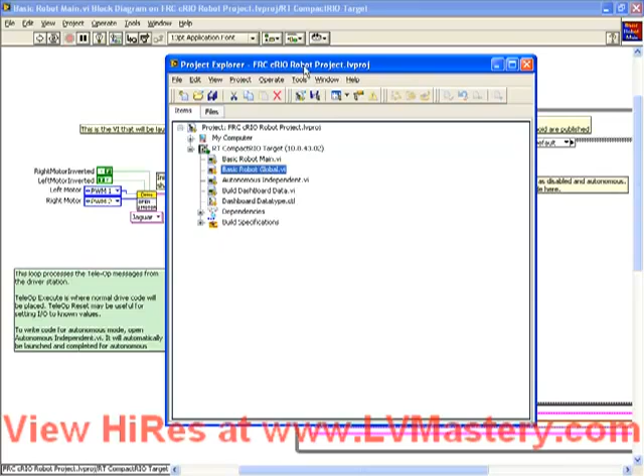Let's start again on the basic robot main VI. If we click on our project window, we can always access the basic robot main VI by double-clicking on it. Then we can show the block diagram to investigate the code. As we saw before, this code is provided with the FRC version of LabVIEW, and the modifications we've made here are really just two additions, similar to what we did in the end of the last video.

I've added a servo. I open that servo by creating a reference to it outside the loop here and by feeding in the necessary channel. And in this case I've also added a gyro. So I've opened up a gyro sensor and I've attached it to analog channel AI1.

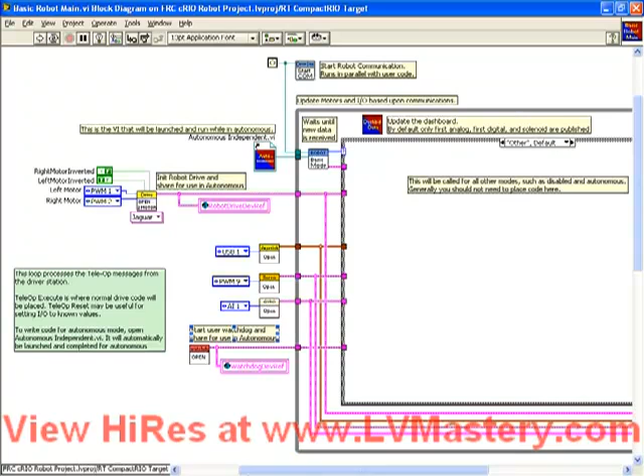As discussed in the last video, you need to open a reference to these objects, whether it's a servo or a gyro or any other object. You need to do that outside the while loop on the left hand side here, and then you wire into the basic robot main. We've done that here with both the servo and the gyro. And if we follow these wires around, we've also made copies of the servo close and gyro close, and we've wired those reference wires into them.

When we take a look at the teleop execute case, we see that we've got the gyro get angle, and if we turn on our context help, we see that that returns either the angle or the angular rate from the gyro. And we've got the servo set angle, which is going to allow us to change the angle of a particular servo motor. The functionality of this code is really quite simple and frankly entirely useless, but it's good for a demonstration of how we can connect a sensor up to an output.

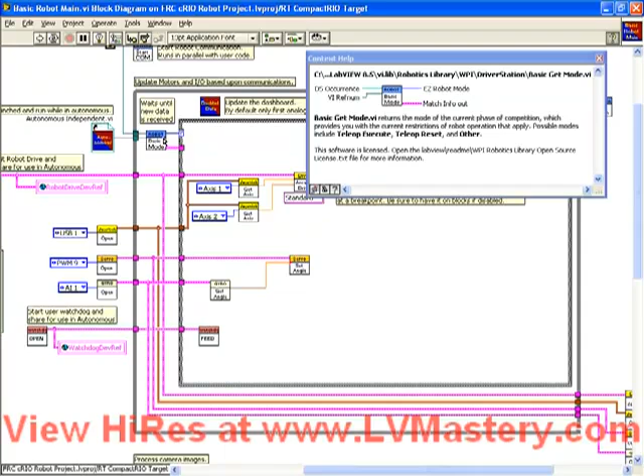At any rate, we wanted to talk more in this video about the autonomous mode than the teleop. If we take a look here, we've got this block called the basic get mode, and this is a VI which is provided in the WPI library, and it's something which we should not modify at all. Essentially what it does is it communicates with the driver station, finds out what mode the robot's in, and spits out a value which is then used by this case structure to decide how the basic robot main should function.

If we pull down the selector of this case structure, we see that we've got the teleop execute case, we've got teleop reset, and the code sitting here will be executed whenever the teleop mode is reset. And we've got other. Other here is a completely blank case. As it says here, this will be called for all other modes, such as disabled or autonomous. Generally, you should not need to place any code here.

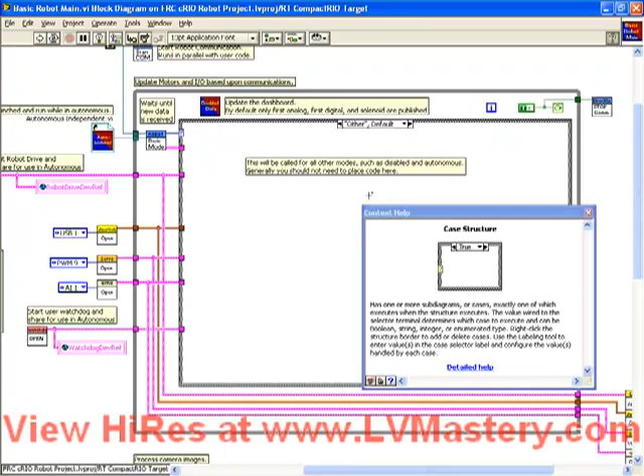So here we've got a blank case for autonomous mode, and the instructions tell us not to put any code here. So it leads to the natural question of, well, how do I write my autonomous code? Where does it go? The answer to that is actually sitting here. This is a reference to a VI called Autonomous Independent. So what does it mean that it is a reference? It's not the VI itself.

Remember what we learned about the data flow methodology within LabVIEW. If this was a VI sitting here, it has an output wire connecting to the input of this while loop. In other words, this while loop wouldn't run until this Autonomous Independent VI finished, and that obviously doesn't make any sense for our application. So it is a VI reference. In other words, it is a way to tell the framework of the code where our Autonomous Independent VI is.

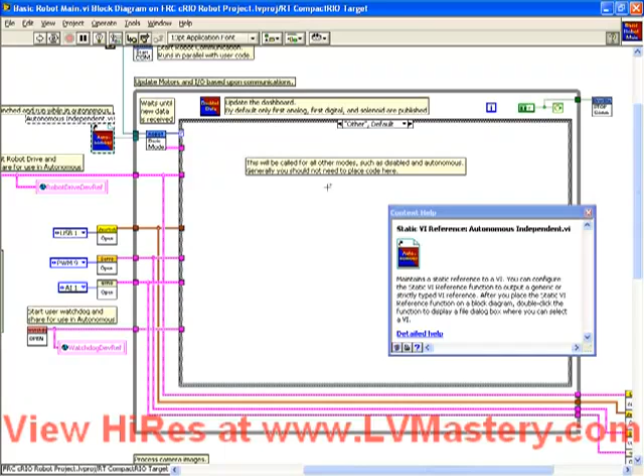Behind the scenes, the framework is taking care of launching and shutting down our autonomous code. That's why it's not sitting here. It's not sitting in the teleop. Actually, if you look very carefully down into the code inside this basic get mode, and we won't go through that at this stage, I think it's beyond the scope of this video, you're going to find where it automatically launches and automatically shuts down that Autonomous Independent VI.

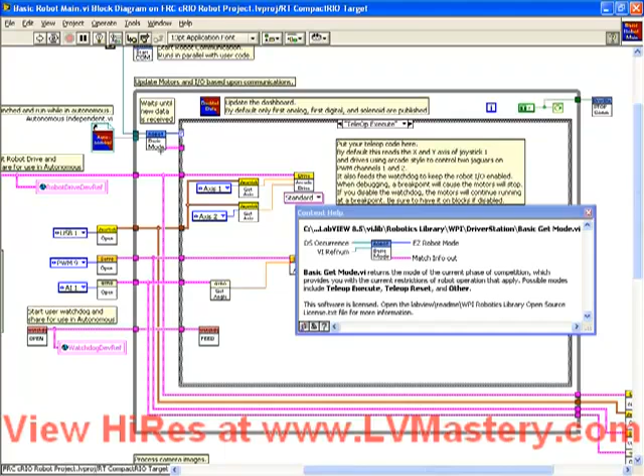It is enough for us to know at this stage that if we want an autonomous mode, we've got to put our code into this Autonomous Independent VI. We don't have to worry about when it gets launched and when it gets shut down. So how do we get at this VI? This isn't the VI, it's just a reference. Well, because it is a reference, if we double click on it, it will open the Autonomous Independent VI. Alternately, if we were to go to our project window, we would see sitting here in the root of our project is the Autonomous Independent VI.

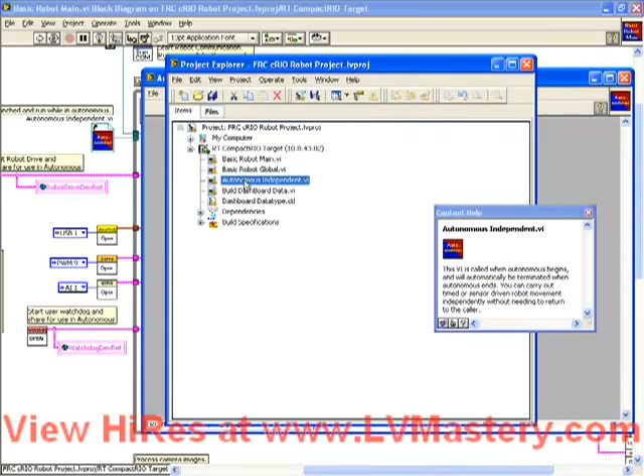So that VI is automatically created for us when we create a project. So if we take a look at its block diagram, we'll see that some sample code has been provided for us. So if we just read the notes here: open or use shared I/O resources, run until the autonomous is over. No need to check for when to end. This function will be terminated when time is up. And it talks a little bit more about the Watchdog.

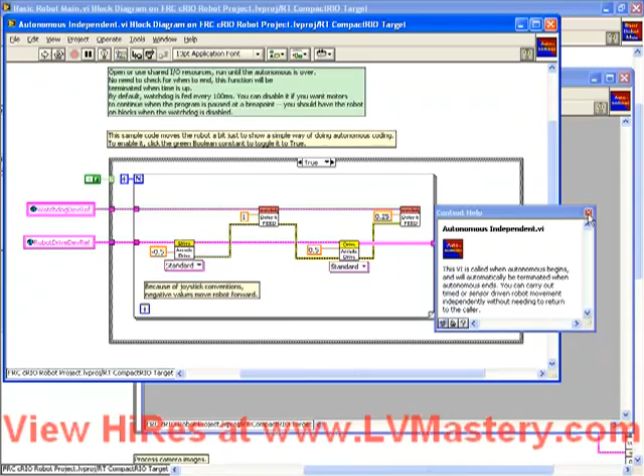Essentially what we have here, and if I hide the context help, is we have a VI which performs an arcade drive, a delay, an arcade drive, another delay, and then it repeats that 4 times inside a for loop. So if we activate this autonomous mode, our robot is going to move in one direction at half speed for 1 second, in the opposite direction at half speed for a quarter second, and then it's going to repeat that a total of 4 times. And at the end, it's going to set the speed to 0.

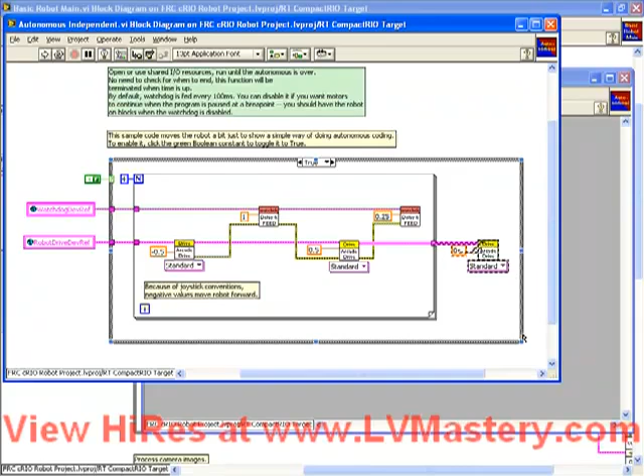So if you want to try this out, all you need to do is flick this Boolean constant to be true, and then when you run your robot next time and you flick it into autonomous mode, it's going to drive. So be very careful before you do that. Before you click run, make sure that the robot is up on blocks or it's not going to run into a wall or do anything crazy.

Don't let your mechanical team find out that the programming team broke it running some sample code. That'd be really quite silly.

So what I want to talk about now is how can we make modifications to this to suit our own purposes. Obviously, I think it's safe to say that this autonomous code is not going to work to allow us to win any points in competition. So we're going to need to change this code to do what we need it to.

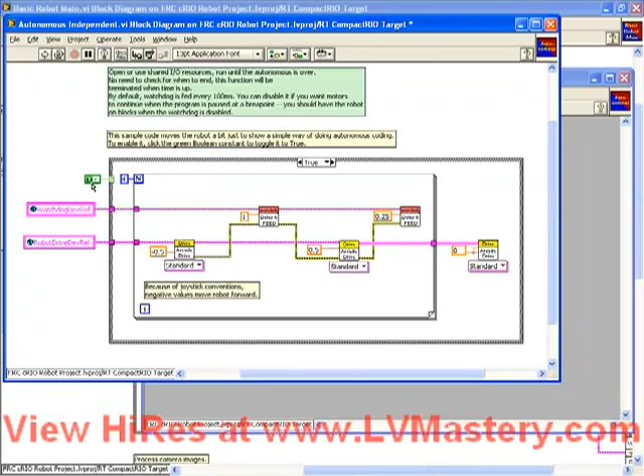So what we're going to do in this example is we're going to take the servo motor, which we've activated in our basic robot main VI. We want to control it in autonomous mode. I think what we'll do is we'll turn it to one extreme, let it sit there for 5 seconds, and then turn to the other extreme and sit there for 5 seconds, and then just repeat that continuously. So let's take a second now and look at what we need to do to achieve that. Let's go back to our robot main VI.

Well, we have a servo set angle VI, which makes it very easy, and if we activate our context help, we see all that we have to wire into that is a number which represents the angle in degrees. So we know how to do this. We can put in a servo command, which is going to send it to one extreme. Then we can use a delay block, and then we can put it to the other extreme. But before we can do that, what we have to notice is when we wire up the servo set angle, we need not only to set its angle, but we need to tell it which servo we care about. We need to do that by wiring up a servo ref.

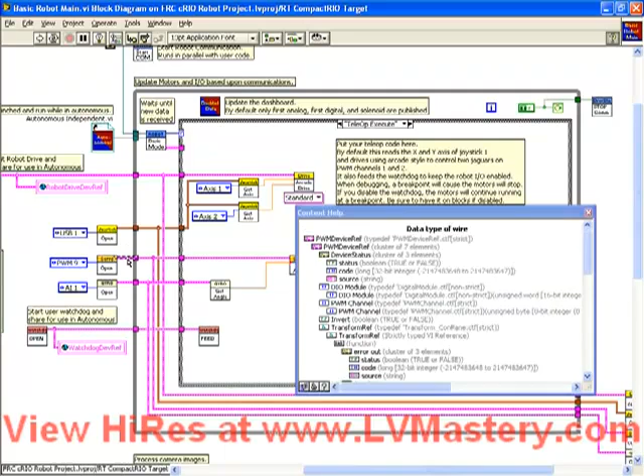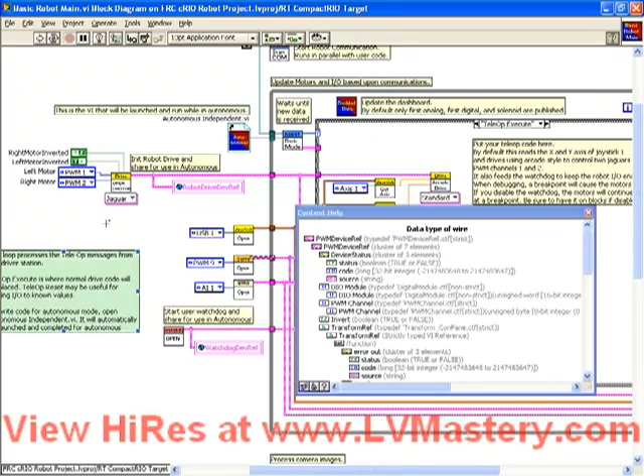So here in our basic robot main VI, we opened up a servo. We opened up the one attached to PWM9. So what we need to do to be able to talk to that servo in autonomous mode is we need to be able to access that reference. And when I talk about that reference, I'm referring to this wire. So before we get to the answer on how to do that, let's just take a quick look a little further to the left, because we noticed that that autonomous mode was talking to our motor drives. Let's just return to that to take a look at it.

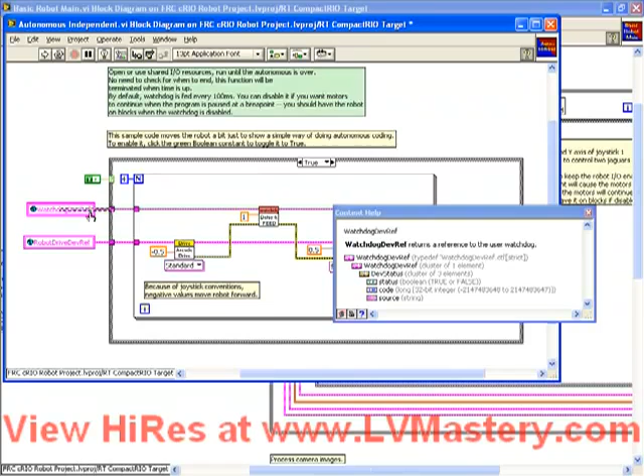We see here we are talking to the robot drive. And where is that wire actually coming from? Well, we have this guy here. This is actually a global variable. And what global variables do is they allow you to make data available anywhere in your LabVIEW program. And naturally, this is how we're going to make the servo reference available. So we see we have 2 global variables here, one for the Watchdog and one for the robot drive. And we can see in both of these cases, these global variables are acting as outputs. In other words, the data is coming out of those global variables and then being used by our autonomous VI.

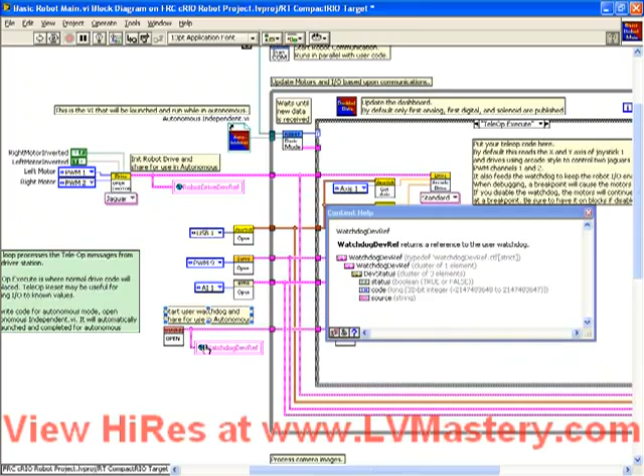If we return to the basic robot main, we see here that the reference that we opened to our 2 motors is being fed into the main while loop and being used by our teleop mode, but it's also being fed into this copy of our global variable. And the same is true for the Watchdog. We open up a Watchdog reference here, and we put that reference into the global variable. So what we need to do in order to make our servo available in our autonomous mode is to create a global variable for it.

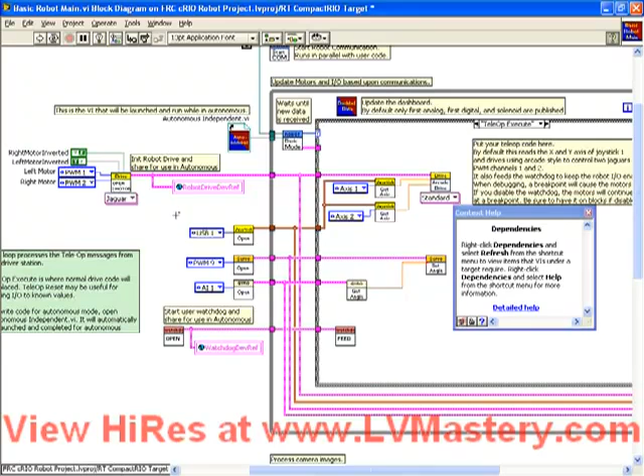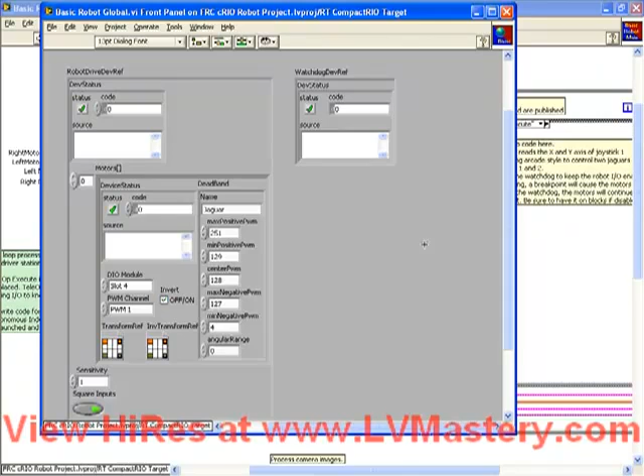And there's a couple different ways to access our global variable to add things to it. The simplest is just to double-click on this global variable. And you see what happens, if I hide the context help, is that this basic Robot Global.vi is opened. If we go to the window and try and show block diagram, we'll see there is no block diagram. A global variable is essentially a VI which allows you to store data, but it does not have any code whatsoever. It's merely a repository for data.